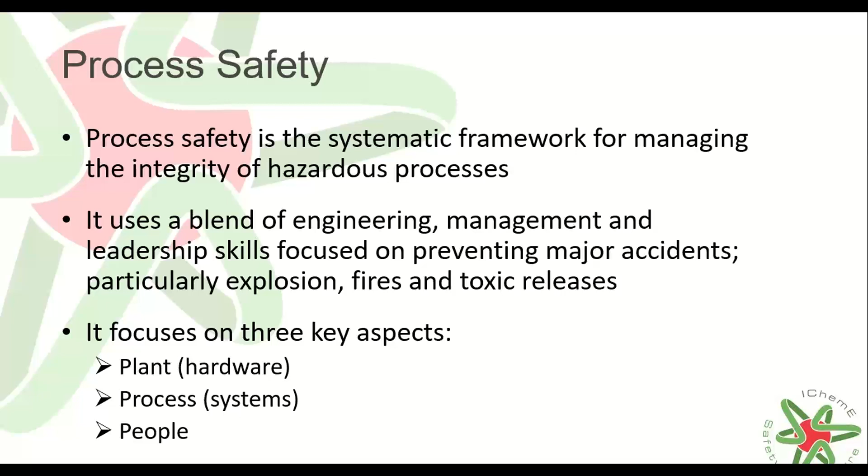That is crucial. And that's why it's a system, because you can't just say, oh, well, I work for HR, so all I do is deal with people, hiring people, and so on. No, you have to understand, and then you have to communicate as well with engineers, but that is another story. I also published a paper on learning from accidents related to recruitment, where you fail to communicate. What I try to say here is that the system is complex, and what are the elements that are important.

And then we have occupational health and safety. It is a multidisciplinary field concerned with the safety, health, and welfare of people at work. It tries to prevent illness and injury at work by recognizing and identifying the hazard. So this is at a people level, at worker level. Obviously, the consequences are different from a process safety incident. It takes into consideration different types of risks that workers are exposed to: physical, psychological, biological, chemical, ergonomic, you name it.

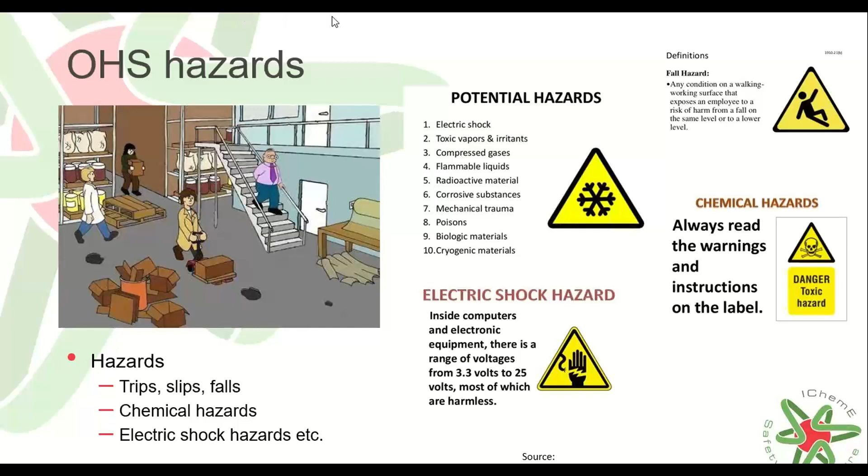To be honest, when I put together the slides, I could have prepared, I think, 10 to 20 similar slides with repeated accidents from the past, which were process safety incidents. The list is horribly long. From my past experience administering the European Major Accident Reporting System, eMARS, I highly recommend, if you haven't come across that database, just look at it because it's publicly available. For those of you who are interested, just email me and I'll give you the details.

So there are certain criteria within the Seveso directive, and therefore also in the COMAH regulations, that you have to report incidents that occur in your particular country if that event meets the requirements of Annex 6 of the Seveso directive, which is that you have a substance released above some particular amount, or a number of fatalities, injuries, environmental impact, and so on.

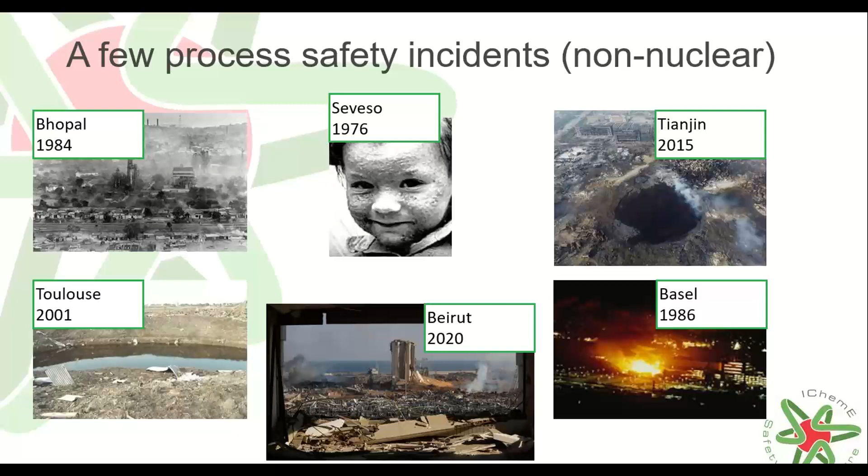So what I was trying to explain here is that these are high consequence accidents with really serious impacts. And what are those impacts? What are those consequences? Compared to occupational health and safety incidents, where you can have personal injuries, you fall off the ladder, you could die. Yes, unfortunately, that happens. You can cut your finger, you can burn yourself, you can spill a toxic chemical on yourself, on your dress, and so on. So you can have those impacts.

Now, in terms of process safety incidents, as you could see, all the craters, or the high destruction after the accident, or the many people that were injured or dead after the toxic release, you can say that these are high consequences, such as the human loss and injuries off-site and on-site. The environmental impact is massive. Think about Baia Mare, think about Basel, Macondo, just to name a few.

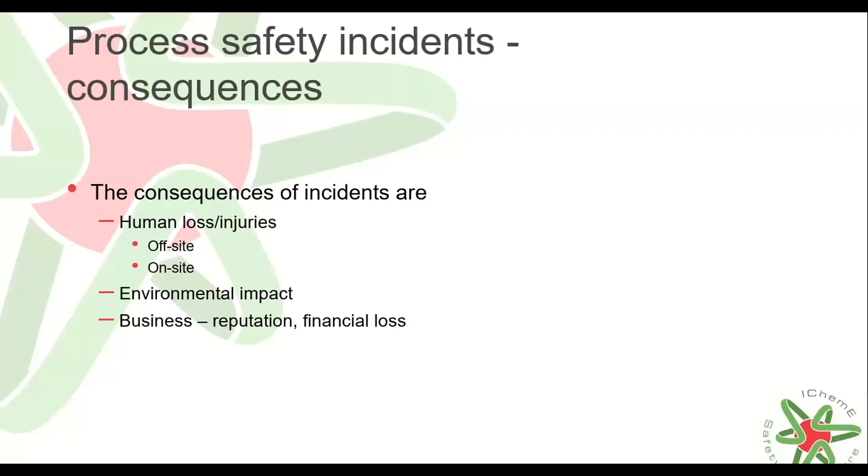Business, reputation, and financial loss. Many of the businesses can't survive an accident. They cannot. And it's not uncommon. It happens that they just can't survive any of those. So this is why process safety incidents are really expensive in all these terms.

This is my favorite chart. When I did the IChemE Fundamentals of Process Safety course, a one-week course, I enjoyed it very much because it goes through many process safety incidents that you can learn from in many aspects. Then we come across this diagram that puts together personal safety and process safety. When I mention personal safety, or occupational health and safety, I mean the health and safety of workers. And process safety is about industrial sites and activities, either production or just storage facilities.

And you can see here the severity of those events, and here the frequency of occurrence, from low to high. As I mentioned earlier, personal safety or occupational health and safety related events are high frequency but low severity. But they move forward to process safety, and at one point they can meet. So you can't just differentiate them as either this or that. No, they can overlap each other.

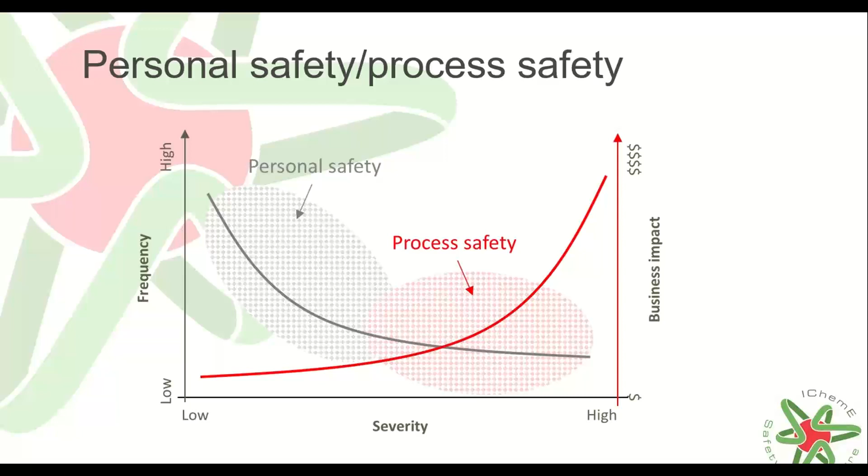So this is a really good chart. I would highly recommend you keep it in mind all the time, because it represents where we are when we talk about personal safety as well as process safety. That's why I was hesitating when I titled this webinar OHS versus process safety. I want to talk about both. Actually, what are the differences? We like separating and structuring things so that we better understand. Three key factors, and you will hear much more about this in the webinar by Trish Kerin, director of the IChemE Safety Centre, in the autumn.

A really, really good webinar. I highly recommend you to join in, and she will build more on this aspect about leveraging from occupational health and safety and process safety. But I would like to touch upon these three key factors that are the main differences between occupational health and safety and process safety.

What I have to highlight first is that both are equally important, but each requires different skills to manage. Okay, so the similarities, though, are that both are hazard and risk-based, and both require management systems. So we have to highlight and mention the similarities also.

When we talk about the differences, however, the mechanism of what causes one or many of these accidents, either occupational or process safety, is different. While both process safety and occupational health and safety are concerned with the potential loss of control of hazardous energy, because it can be the consequence of both of them, process safety is usually about managing the higher levels of energy loss. The scale of potential consequences, I already compared them to each other, so you get the picture of that.

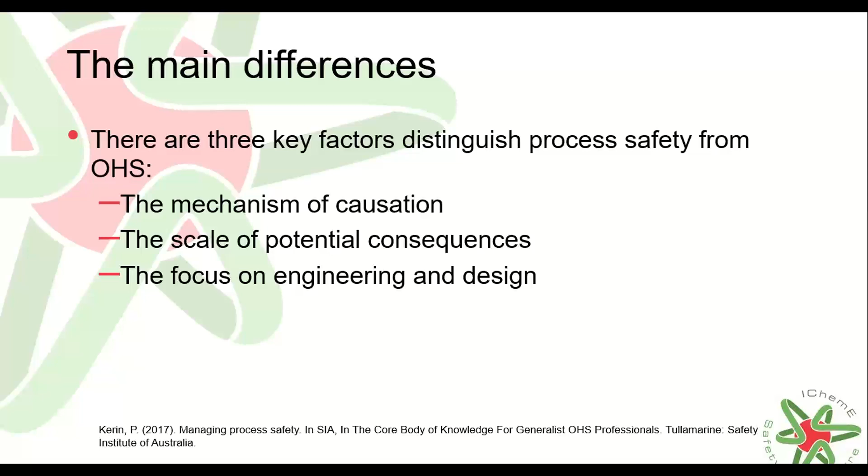And I guarantee you that Trish will go into the very details of these differences in her webinar. So I don't want to talk about that more, but I would like to show you more aspects, some of the underlying details.

And what about the frequency of occurrence? Yes, we talked about it: process safety incidents occur with a lower frequency, but potentially higher consequence, higher impact on the environment, people, business, reputation, you name it.

Process safety prevents hazardous releases. It includes the prevention of unintentional releases of chemicals, energy, and other hazardous materials, and occupational health and safety generally refers to classic health and safety associated with the prevention of trips, slips, and falls, if we want to keep it simple and focus on those aspects only.

Process safety tries to protect everyone. What does it mean? It means that when you have an industrial site, just picture one. It's a complex one. Or just think about a warehouse or an LPG storage facility or a chemical or pharmaceutical factory, oil refinery, whatever you want to think about. It tries to protect the workers within the facility, together with all the contract workers and all the drivers, and it tries to protect the surrounding area, the people around the facility.

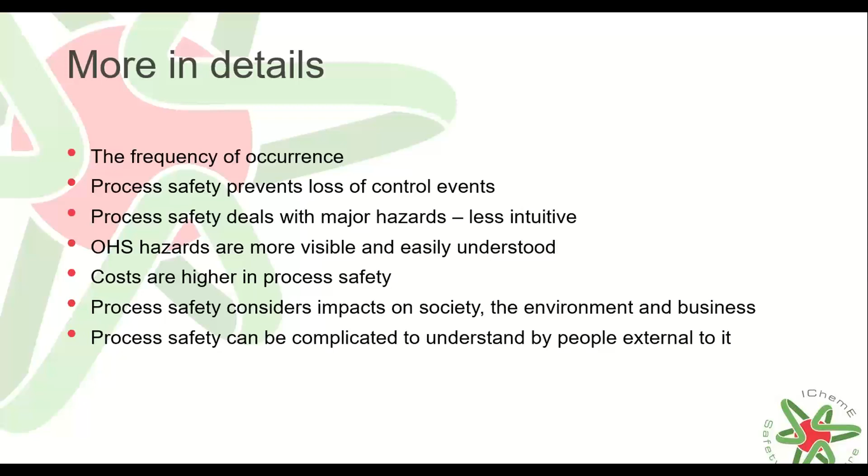And with many other financial aspects, it's a loss that is really high when an accident occurs. I know that you all know what the late Trevor Kletz said: yes, process safety is expensive, but try an accident. I may not quote it precisely, but you get the message, I think.

Now, how many of you have heard of this particular case I am about to present? Remember, I mentioned the two areas, personal safety and process safety, and when they overlap each other. And some of you already asked in the question box, what is this overlapping area? Now, this is it. This is one of the examples that I would like to give you: what happened at the Mumbai High North platform.

You may have heard of the story, but I truly believe sharing is caring, so the more we tell the story, the more familiar we become with it, like with fairy tales. The more you hear it, the more you can tell it. So it is about this particular platform. What happened here is the following.

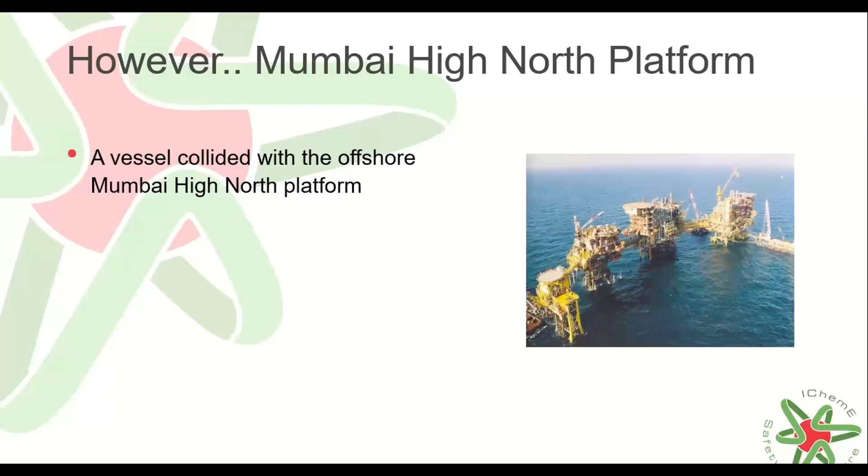There was a vessel that collided with the offshore platform called Mumbai High North, situated around 160 kilometers west of the Mumbai coast. It caused a major fire, destroyed the platform, and not only resulted in two severed fingertips, but unfortunately killed 22 people as well. And over 300 had to be rescued from the platform. On top of that, the fire continued to burn for 2 hours, completely destroying the whole platform.

It's a massive platform, and those of you who work on oil platforms or in the oil business know how much loss we are talking about here. I don't quantify it, but you know this.

So on the 27th of July 2005, a so-called multi-purpose support vessel was completing a diving campaign when a cook, a chef, on board this vessel cut off two of his fingertips. Upon recovery of the diving bells, the vessel requested the injured employee to be transferred to the platform.

The weather conditions: we are talking about July on the coast of Mumbai. So the weather conditions were really, really unfavorable the day of the event. Monsoon rains and high winds prohibited the use of the helicopter deck. The leeward crane of this platform was out of commission at the time, so the vessel began to approach the platform on its windward side.

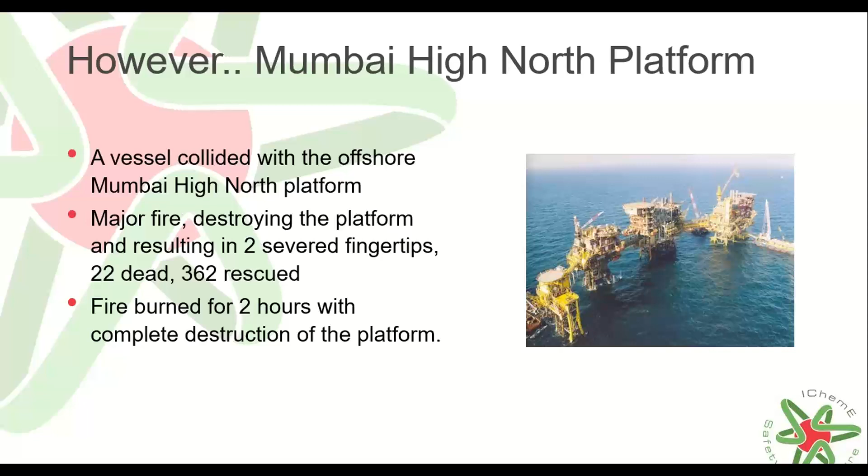You can find the investigation report if you Google Mumbai High North platform on the internet. So that is accessible from the internet with all the details, all the causes, and of course there are underlying issues there. Since in the beginning I mentioned to you that always measuring performance, both in occupational health and safety and process safety. Now, I highlighted here what's the difference.

So occupational health and safety measures injuries that have occurred to people, monitors health of barriers preventing those incidents, and process safety measures process safety incidents that occurred. So it's not what occurred to one or two workers or how many people, but it measures process safety incidents, complex accidents, and monitors health of barriers preventing process safety incidents.

So barriers that are able to prevent occupational health and safety incidents are not often the same as the barriers that prevent process safety incidents. They could be, there are, but not all of them. And that is where there is maybe a sense of unclarity, why we cannot just simply cut the line between occupational health and safety and process safety, because there is no clear cut. So that is where you measure and what you measure.

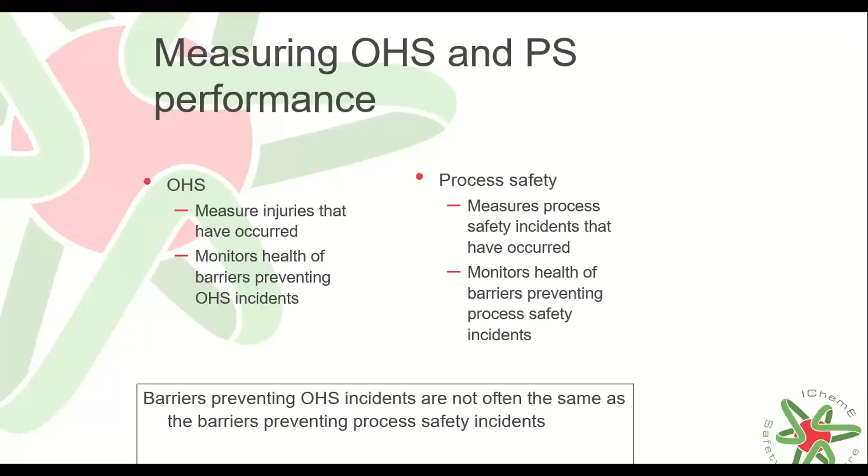Always try to understand what you want to measure and why. Why do you want it? Because you want to see the nice charts, because you want to present it to the CEO, or because you really want to understand what is going on in the background. So I encourage you to try to understand and process in yourself what your overall goal is with measuring the performance of either the system or the occupational health and safety aspects.

But don't be misled. Okay, traditional occupational health and safety metrics, such as lost time injuries, are not a proxy for process safety. I think that we learned the lessons from that very, very clearly from really high visibility events such as Deepwater Horizon or Macondo, as I referred to it in the past couple of minutes, and maybe Longford and maybe the Texas City explosion, and so on.

So those are the major incidents that focused on high performance regarding lost time injury and safety first. You can see it everywhere, posted on ships, platforms, sites, everywhere. But unfortunately, those measures did not reflect process safety in that particular site or operation. So while incident history is really, really important to show the improvement, it is never the predictor of the future. And only lead process safety metrics can give an indication of likely incidents to come, but they are not predictive.

So try to avoid cases where you focus on incident history only, and try to always monitor your metrics, whether they reflect what is going on and what you want to achieve. So for instance, if you see that you have so many incidents, then you try to focus on the prevention side, so that you try to understand better why those accidents or near misses are still occurring, because we have to mention near misses also in the story. What is happening there, why it cannot be prevented. So then you come back to the leading side and try to establish more, or try to monitor and review those lead process safety metrics,

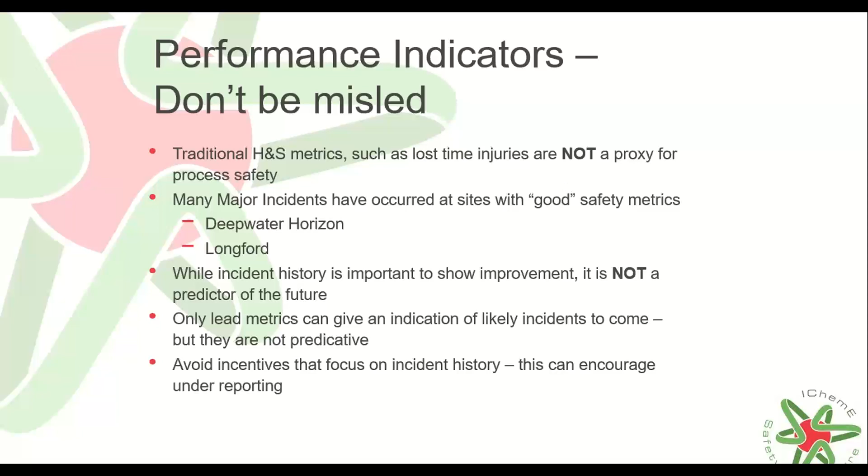So this is what the indicators or metrics are about. And of course, we have a guidance document on metrics, freely available for everyone. One is the basic guidance document on lead process safety metrics that was based on the practice of operating partners of the IChemE Safety Centre. So they put together those lead process safety metrics that they think are the most crucial ones to identify and develop further.

So if you want to check your system, what it is about your process safety metrics, then you can do like a gap analysis comparing your system to this guidance document. It is not obligatory, obviously. It's just a guidance. But I have to say that this is a short, concise, practical guidance document that gives you direct implications about this and that metric, how you can implement it, what the connections to other metrics are, and so on, with a couple of examples as well.

And further to that, if you want to apply that in your operation, you can even think further down the line. Therefore, in 2019, we published a supplementary guidance document to that first guidance document, because there were a couple of metrics that the operating companies thought required more in-depth knowledge. So that working group put together this supplementary guide on pressure relief devices, especially the design and operational performance requirements. Also free to download. And we are now working on permit to work system and alarm rationalization related metrics. Quite hard work, but they will be published soon.